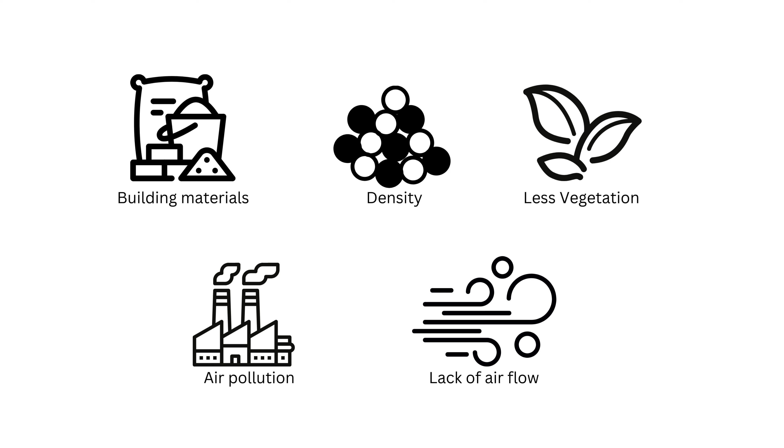Over the years, Melbourne has experienced extreme heat conditions increasing rapidly each year. Melbourne's efforts to reduce urban heat are increasingly becoming more important as the city grows. Currently, Melbourne experiences approximately 5 to 10 days per year where temperatures reach 35 degrees.

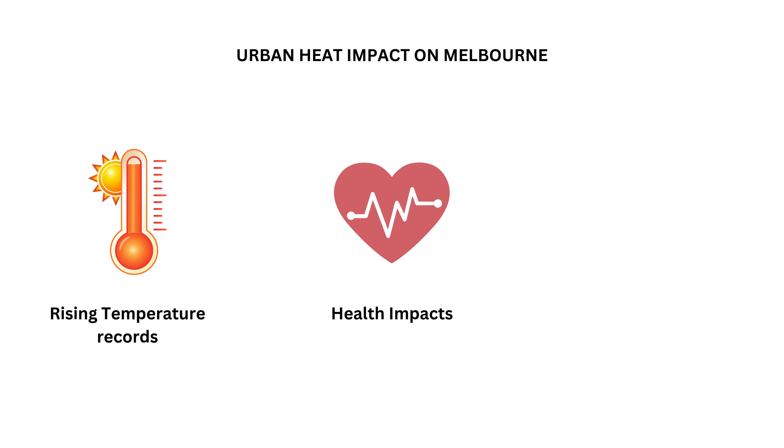However, projections from the Bureau of Meteorology and Climate Council indicate that by 2050, this could increase by 20 to 25 days annually. Urban heat has significant health implications, with the Victorian Department of Health warning that rising temperatures will likely lead to more heat-related deaths each year. Additionally, infrastructure is affected, resulting in public transport disruptions and power outages, as noted by Transport for Victoria.

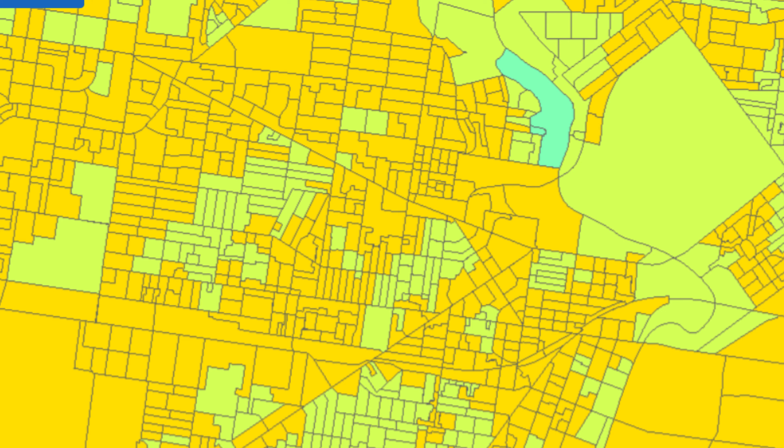These heat maps show the temperature of Melbourne in 2014 compared with 2018. This is definitely an alarming sign where temperatures have risen within just 4 years and they continue to do so.

Footscray is known for its diverse community, vibrant culture and its rich history. Footscray Market is known for its fresh produce, food stalls and great atmosphere, and therefore we will have this site as an example to show how urban heat can be improved in certain areas of Footscray.

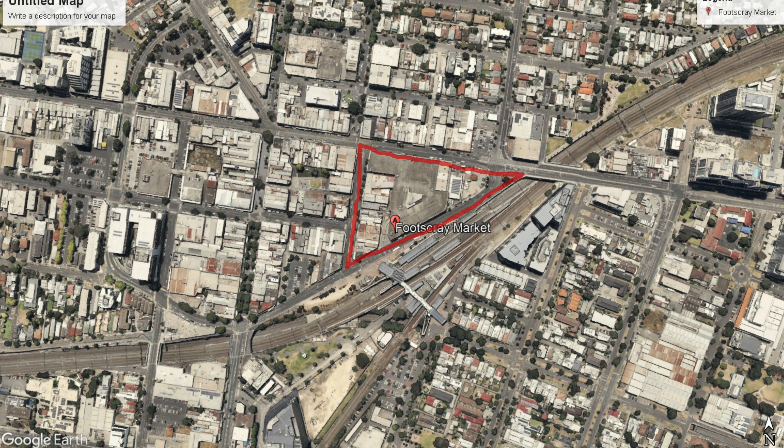The current market is located at the base of the building, with a double-storey car park above. The main material used is concrete with some glass. The choice of material absorbs heat, which ultimately makes the building itself warm, making the inside of the building quite hot as well.

The gaps in the facade on the upper floors allow for some airflow, while the base market levels don't allow for airflow apart from the existing entry points. There is an overall lack of vegetation on this site.

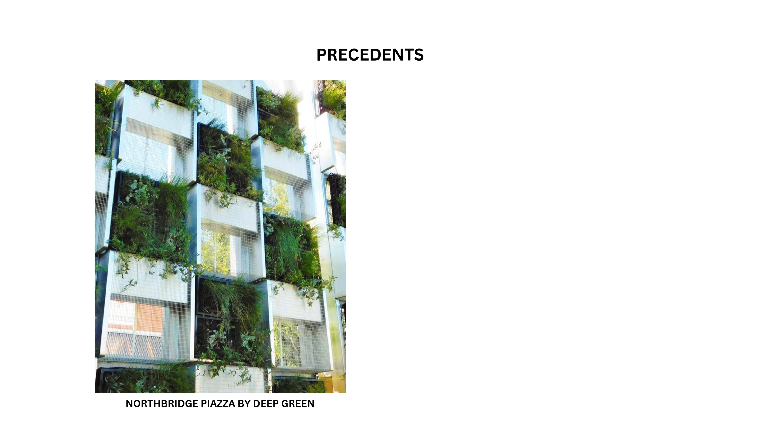Considering this, we decided to add a green wall on top of our existing facade, therefore keeping demolition on the site low while still being able to cool the large concrete form. The rainwater would be collected at the base of the facade and then pumped back into the vertical garden, keeping the maintenance to a minimum.

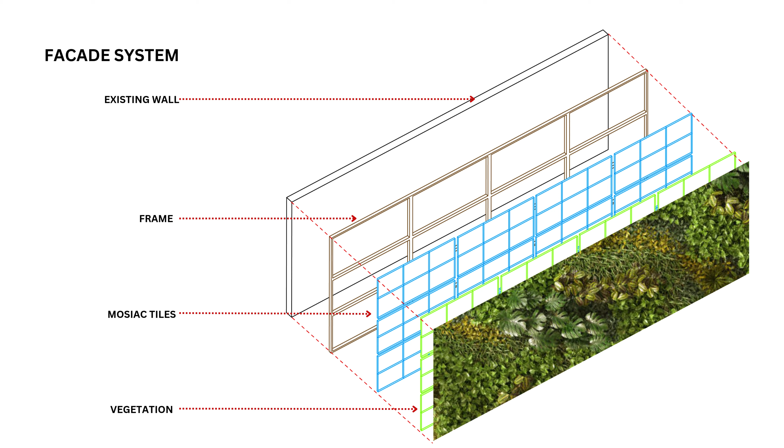On top of our existing facade, we've placed a framing system with mosaic tiles to add a unique aesthetic and allow for an easily modified backing to attach our varied vegetation types on. In our facade system, we have left many gaps to allow for proper ventilation and airflow through the large building.

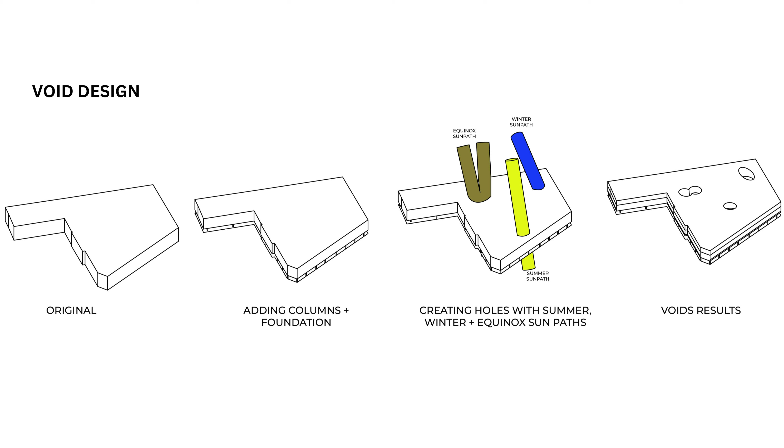For our proposed design, we have demolished the ground walls to create an open market and included columns all through the building structure. Using Melbourne's summer, winter, and equinox sun paths, we have created voids into the building, and each of those voids contains vegetation appropriate for that season.

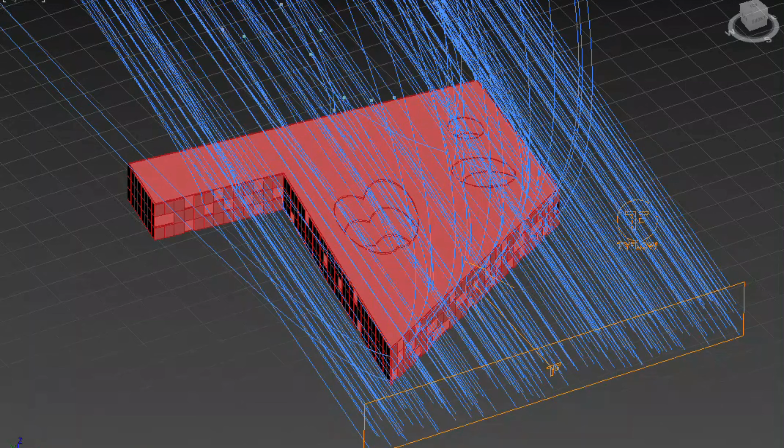Using Tyflow to simulate wind, we can see our proposed project doesn't pose any significant wind risks to the surrounding area. There is an updraft, but no damaging downdrafts from this design. The simulation also shows how wind is able to get inside the building through the gaps that we have created, making this an effective design.

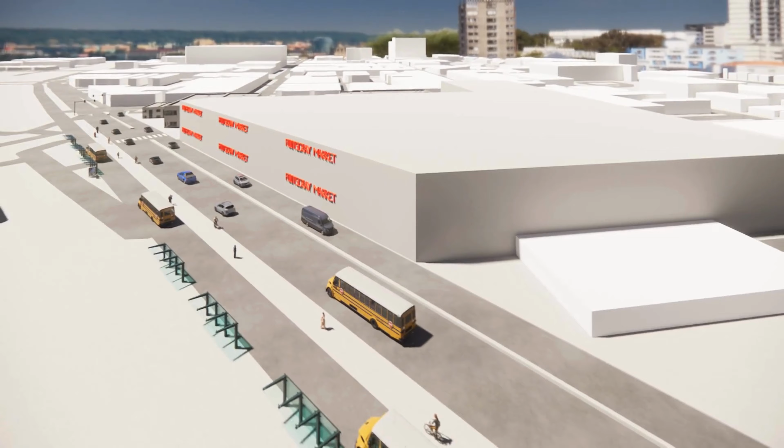This is the existing Footscray market before our design. And now after, you can see how our market stalls are completely open to the surrounds.

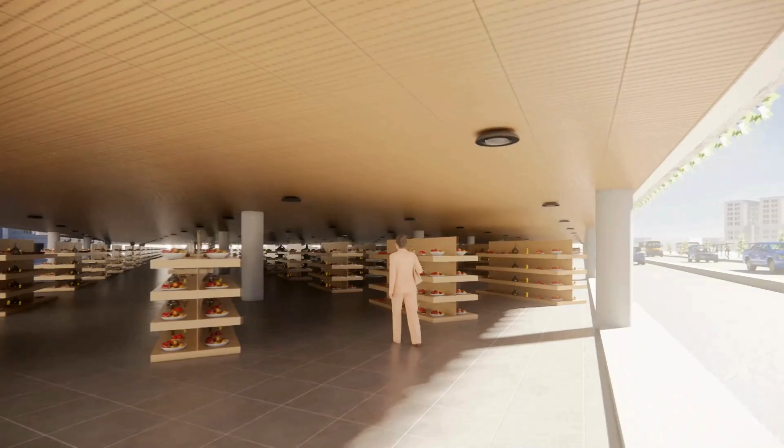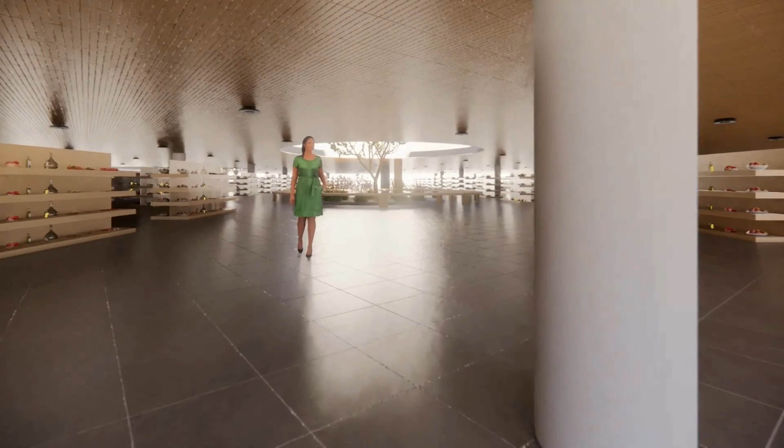Here is an example of our internal atriums that have been angled according to the winter and summer solstices, which include specific vegetation based on their location in the building.

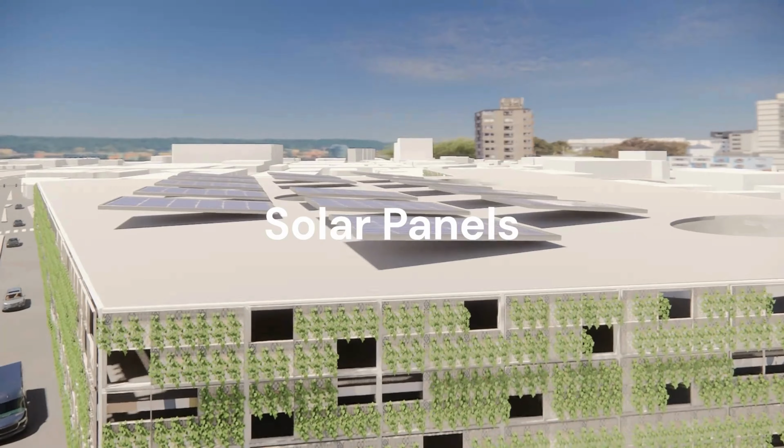Alongside the voids in the roof, we have included solar panels angled to the north to optimize energy creation. And here you can see the overall aesthetic achieved by the addition of our green facade onto the Footscray market.